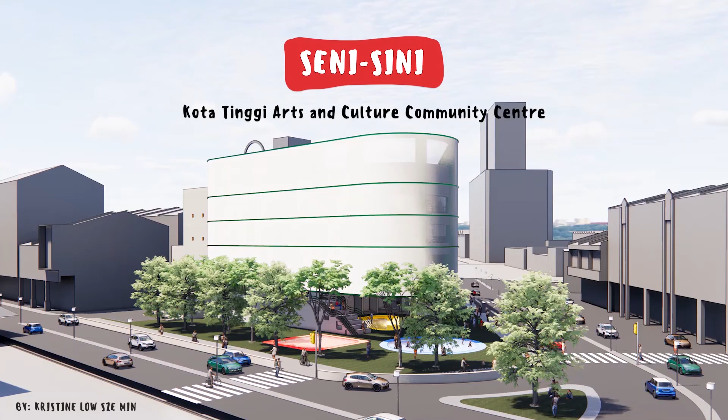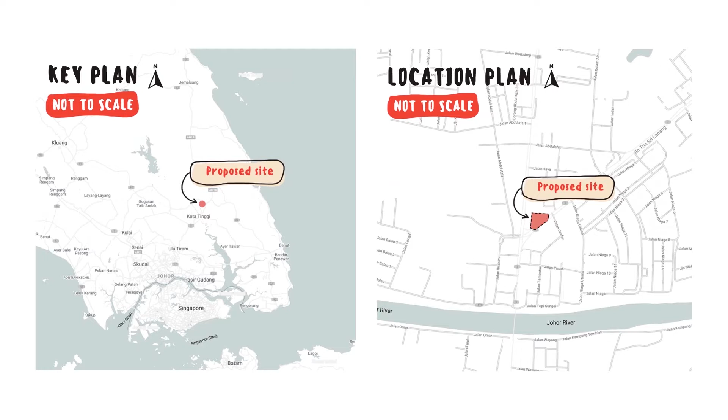Hi everyone, my name is Kristine Low and the brief for this project was to design a community centre located in Kota Tinggi, Johor. The proposed site is located at the main fork junction of Kota Tinggi, which strategically connects its surrounding townships.

Looking at the issues and potential of the site, there were three things I would like to highlight. Firstly, the unconnected town centre, which is prime location as the frontage of Kota Tinggi shows untapped potential for a community binding hub.

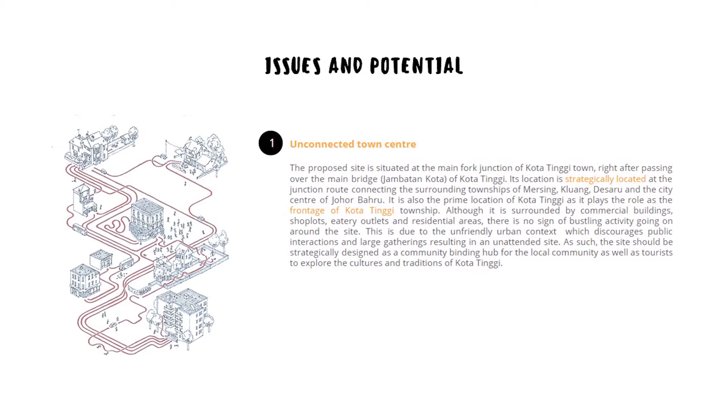Second, the lack of appreciation towards arts and culture, which is a pity as Kota Tinggi is a historical township with a long history of arts and culture, which may be forgotten if it continues to be overlooked by the locals. Third, the lack of proper spaces for cultivating creative and artistic individuals, which is needed for locals to express and showcase their talents, making art more accessible to the public.

Hence, my proposal for an art and culture community centre called SENI-SINI, which in English means Art Here. This is in line with the strategic objectives of the local district council, as well as a survey conducted to identify the most suitable building typology for the site.

The aim of this building is to cultivate local artistic talent, which in the long term would stimulate the local economy, hence creating jobs within the cultural sector and its ancillary businesses.

The objective of the building is to serve as a focal point for the community, instill appreciation for arts and culture, and promote Kota Tinggi's cultural assets domestically and internationally. The client will be Cendana, which is a government agency focused on enhancing the value of Malaysia's cultural economy.

For my precedent studies, I referenced two buildings: the Maggie's Centre Barts by Steven Holl Architects for their beautiful translucent white glass facade, and the Johnson Wax headquarters for their specially designed mushroom column structure by Frank Lloyd Wright.

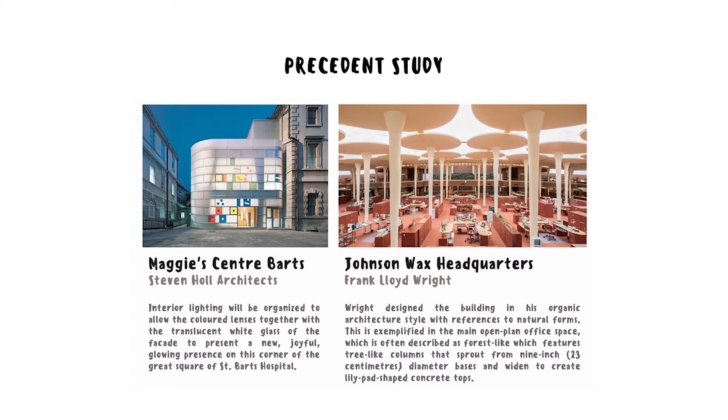The concept behind the design of the building is a blank canvas where the community centre was meant to be shaped by the people and for the people.

This was characterized by the translucent glass facade, which allows the silhouette of the people inside the building to be seen from the outside. The building was also designed with an open plan layout to allow flexibility of spaces, whereby the spaces could be adapted to the needs of the community.

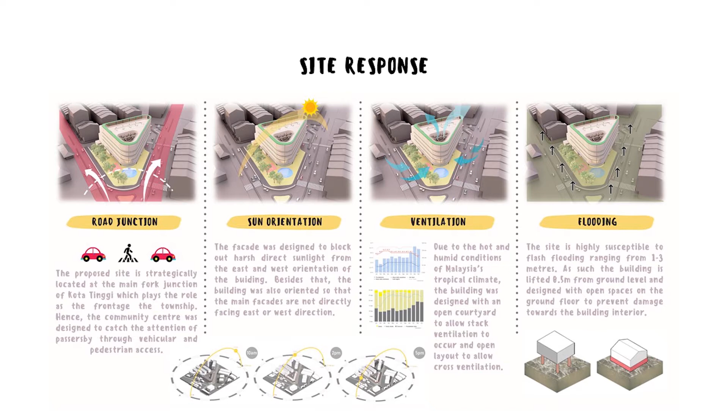The target users are the artistic and non-artistic community, the younger and older generation, and the locals and foreigners. Next, there were four factors considered in the site response: the road junction, sun orientation, ventilation, and flooding.

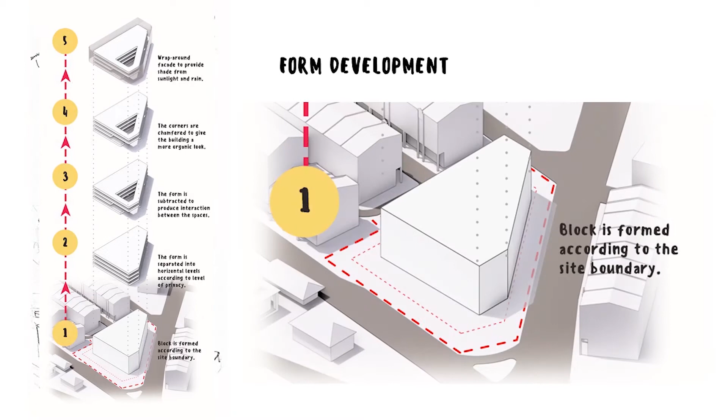From this, the form was developed through initial sketches and brought into 3D with a rough mass formed according to the site boundary. Then it was separated into horizontal levels, subtracted, chamfered, and the surrounding facade was added which wraps around the final building form.

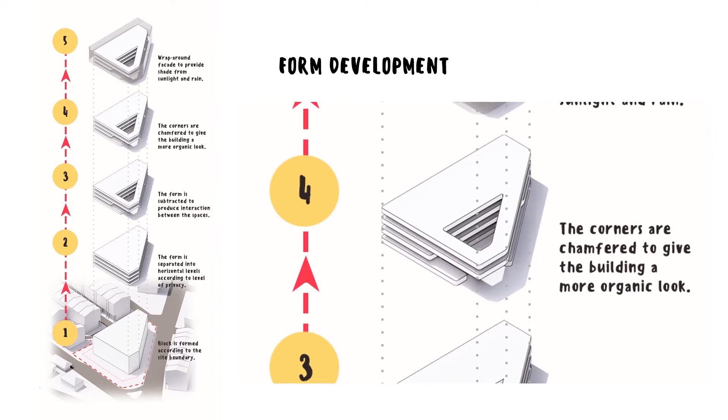We next have the design approach whereby the horizontal beams were emphasized to enhance the horizontal expression of the building, hence giving the building a more humanistic value in line with the concept of a blank canvas.

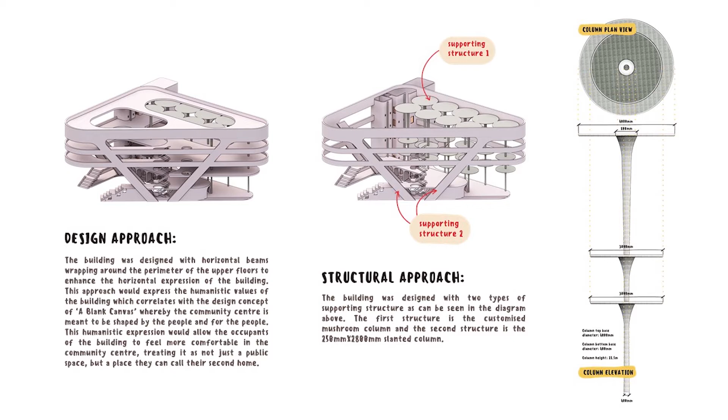The building was supported by two main structures: the mushroom column and the slanted column, where the mushroom column also functions as a rainwater collecting system, transferring rainwater from the roof into the water tank located underground. Another sustainable approach is the facade of the building, which acts as a sun shading device.

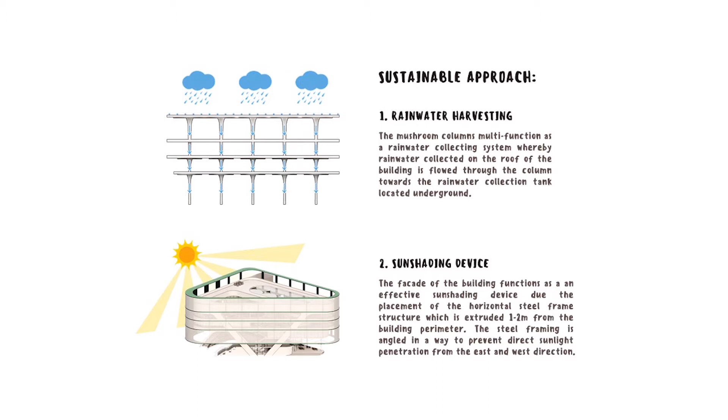However, the question still begs, how can the community centre be sustained in the long run? The answer for this would be through its building programs, which are divided into core activities and supporting activities. The core spaces include the art gallery, the multi-purpose event space which can be used for performances, theatre, and movie screenings, the permanent and temporary exhibition spaces, as well as the workshop studio.

Whereas the supporting spaces consist of the eatery, the meeting pods, the library, the art shop selling local handmade crafts, and the retail space. These programs help complement the surrounding local activities and culture of Kota Tinggi.

Which include its history, myths, and legends, which have been adapted into popular culture such as literature, movie adaptations, and theatre performances. We also have the beautiful murals and artworks around Kota Tinggi and the local trades and small businesses located in Mini Kelantan.

Next, we will look at the spatial layout of the ground floor, where the design emphasized pedestrian walkability, with the footpath surrounding the building perimeter and pedestrian crossings provided at the road junction.

As a response to the role of the site as the frontage of Kota Tinggi, the car park was located at the northeast and services located to the northwest, leaving the site area near the junction for landscaping and user activities. The trees on site were maintained from the existing site, which provides shade for outdoor activities.

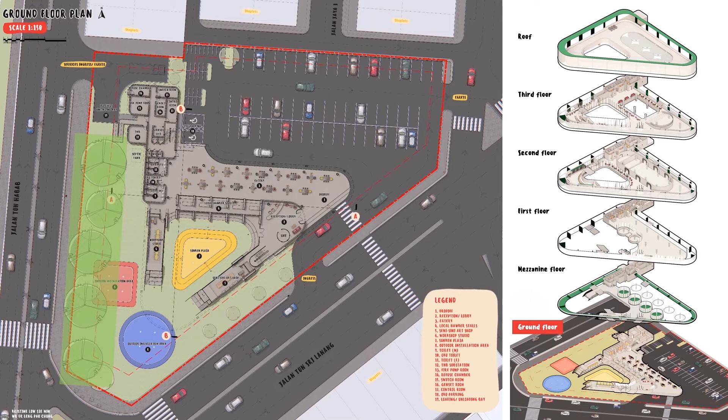The other floor levels from mezzanine to the third floor were designed with an open plan layout with efficient user circulation and double volume heights, providing the spaces with better ventilation and natural lighting, as well as enhancing spaciousness for the users, which can be better visualized through the sections and elevations in the next few slides.

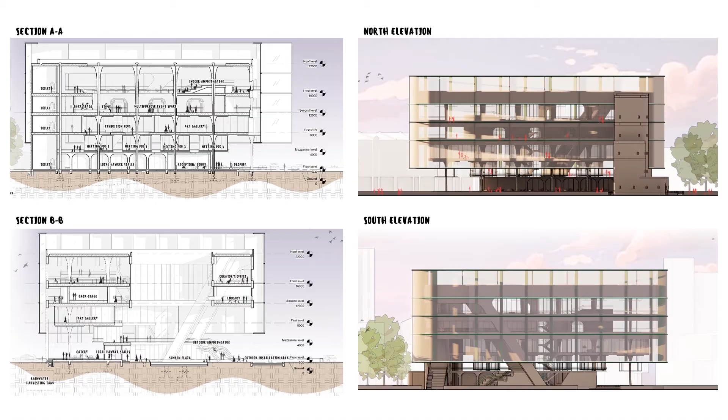From the glass roof light, which allows sun rays to penetrate the building, casting a moving display of shadows inside, to the double volume height event space featuring the mushroom columns with custom hanging lights and an overhanging indoor amphitheater.

Below it is the art gallery with an open plan layout to allow for changing art displays, with the private exhibition space overlooking the Sunken Plaza, and the meeting pods below it, which are seemingly floating above the eatery.

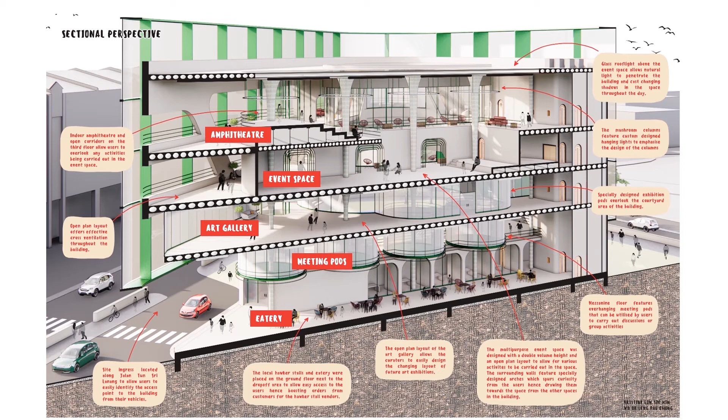Next will be the animation clip. That's it for my presentation. Thank you.